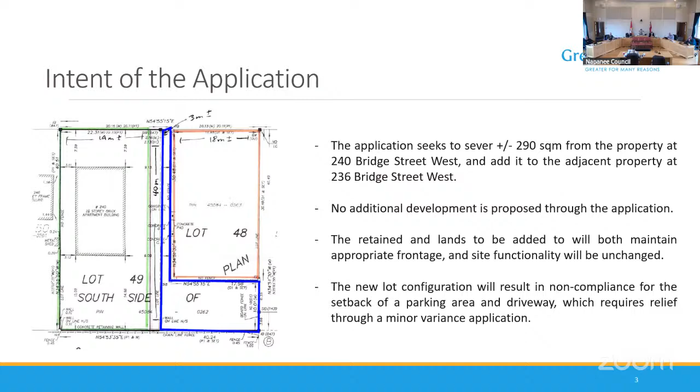There were no technical comments of concern from the public for the application. The county and conservation had no objection. It's a fairly technical land swap. As such, the application has been found to be consistent with the PPS, have appropriate regard for the Planning Act, and conform with the policies of the official plan. It is recommended that the lot addition be approved as presented. I'm available for questions. Thank you.

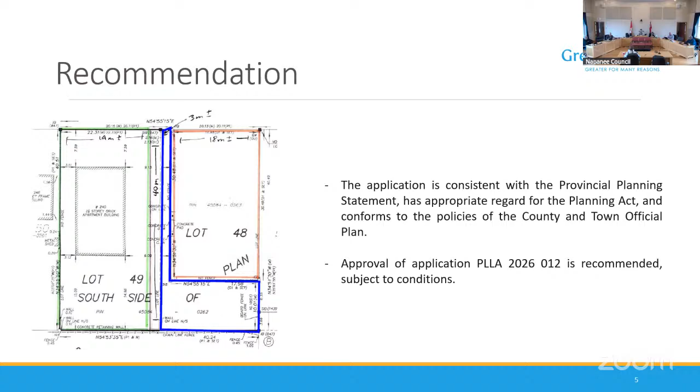Thanks, Dave. Is there any questions, comments, or concerns for Mr. Nanton with respect to the application and the presentation he has conducted? Seeing none, we do have a recommendation that Council receive for information the staff report for application PLLA 2026-012, and further that the application to permit a lot addition of plus or minus 290 square meters be approved, subject to a number of conditions contained in this evening's agenda.

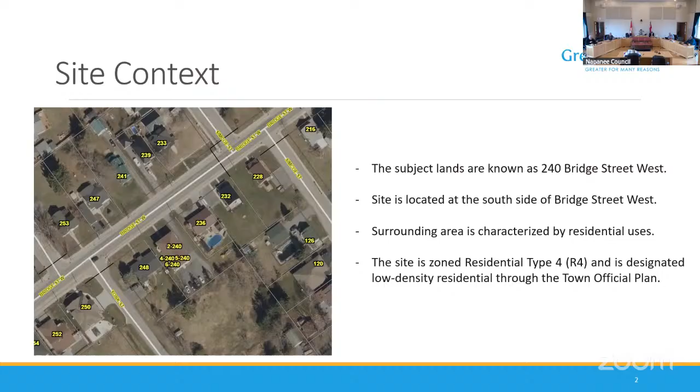Thank you, Mr. Mayor. Through you. This slide might look familiar, as the subject lands of the application are the same as those considered through the last application, but this is specific to 240 Bridge Street. So moving right into the intent of the application.

This application is just seeking a little bit of relief to recognize the new lot boundaries that result from the lot addition just considered. When the new lot lines are formed, it'll just be a slight further encroachment against the minimum setback of a driveway to an interior side yard. It's very technical in nature and really isn't going to change any of the site functionality or operations of either property, but technically a minor variance is needed just to address that non-compliance.

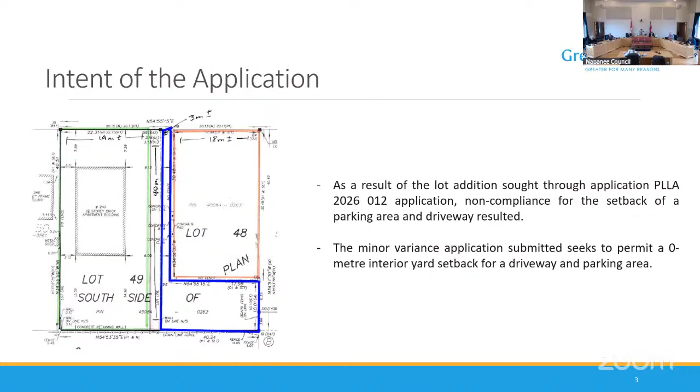So the request of the application is a 0 meter interior side yard at the tightest point, being the southeast corner, for the driveway and the parking area. I just provided this slide to give the context: approximately in yellow, added to the box in orange. So those are the lands to be severed in yellow, to be added to orange. When that happens, they'll obviously get a bigger benefiting backyard.

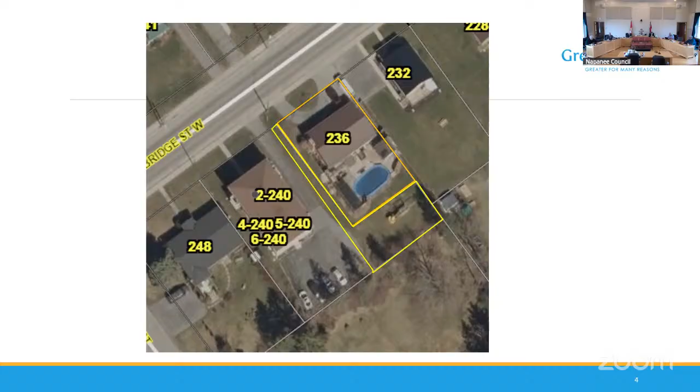But what will happen is the existing driveway we're seeing on this slide kind of jogs out at the back end to add an additional parking space. We don't want to lose the parking for the apartment. So it creates a 0 meter setback at that far area, which needs to be addressed. So it's a fairly technical application as well.

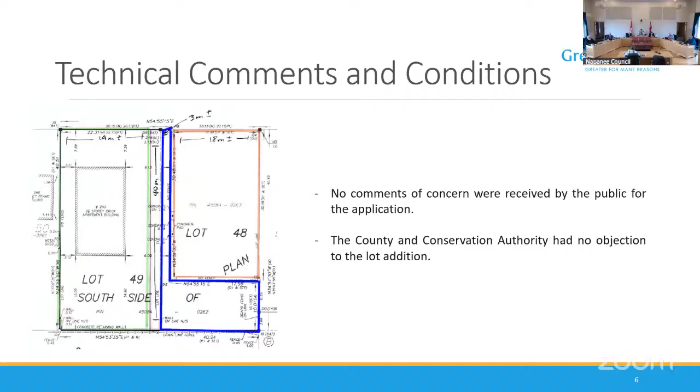No comments of concern were received from the public. The County and Conservation Authority had no objection. And we found that the application meets the 4 tests of a minor variance. I'm available for questions if we have any.

Thanks, Dave. Is there any questions or comments for Dave with respect to this application? Seeing none, we do have a recommendation: the committee receive for information the staff report for application PLVAR 2026-011.

And that the application for 240 Bridge Street West requesting the following variances be approved. Variance number 1, bylaw number 0222, section 4.27.d point V, requirement is the minimum setback of 1.2 meters between a side lot line and driveway. Proposed is a reduction of 0 meter side yard setback. The relief requested is a reduction of 1.2 meters in setback of the driveway from the side lot line, as well as variance 2, bylaw number 0222, section 4.27.I.

Requirement: minimum setback of 2 meters between parking area and the lot line of lower density residential use. Relief requested is a reduction of 2 meters in the side yard setback from the side lot line to the parking area. Look for a motion: moved by Councillor Shank, seconded by Councillor Davey.

If there's no further comments, questions, or concerns, all in favor of that motion? Opposed? Motion's carried. Next matter, file number PLVAR 2026-015, address 807 County Road 12, roll number

1121080060141110. Owner is W&S Demchuk, and the applicant is W.S. Demchuk. Once again, there's no one in the body of the council chambers, so the floor is yours, Mr. Knapp. Thank you, Mr. Mayor, and through you.

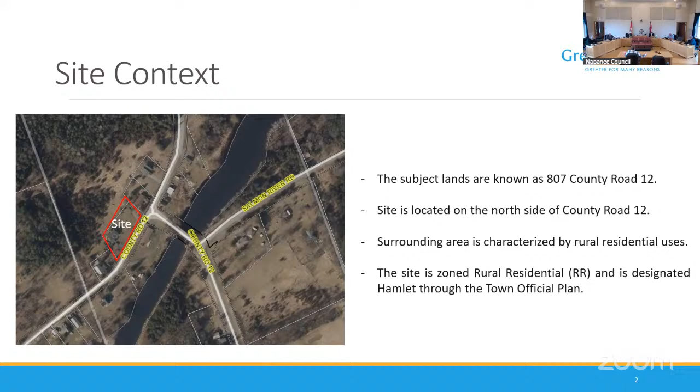To begin with some site context, this application is submitted for 807 County Road 12. The property is shown in red on the slide. It's just on the north side of County Road 12, in the hamlet of Forest Mills. It's a rural residential area, hamlet. The site is zoned rural residential and designated hamlet through the official plan.

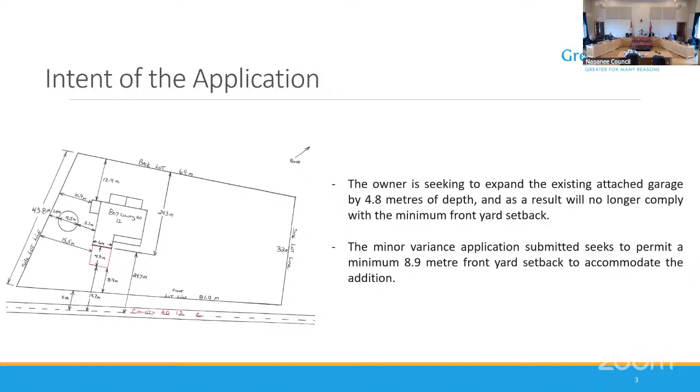So they've come forward with a minor variance request seeking relief to be permitted a minimum 8.9 meter front yard setback, which still accommodates almost 9 meters from the road right-of-way. So it's still a significant and appropriate distance.

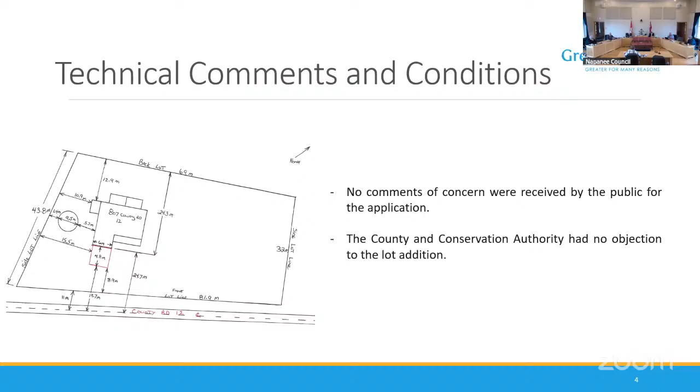No comments of concern received from the public for the application. The county, being the road authority, also had no objection to the expansion. Our recommendation is that the application meets the 4 tests for minor variance, and I'm available for questions if we have any. Thank you.

Thank you, Mr. Knapp. Is there any questions, comments, concerns for Dave with respect to the application or the presentation we've received this evening? Seeing none, we do have a recommendation the committee receive for information the staff report for application PLVAR 2026-015, and for the application for 807 County Road 12 requesting the following variance be approved.

Requirement is section 58.2 sub C sub I, minimum front yard setback of 15 meters. The proposed is a minimum front yard setback of 8.9 meters. Relief requested is a reduction of 6.1 meters in the front yard depth.

Look for a motion, moved by Councillor Davey, seconded by Councillor Shank. If there's no further comments, questions, or concerns, all in favor of that motion? Opposed? Motion is carried, and we'll look for a motion to adjourn the Committee of Adjustment.

Moved by Deputy Mayor Calver, seconded by Councillor Martin. If there's no further comments, questions, concerns, all in favor of that motion? Opposed? Motion is carried. Thanks, folks, and we'll see you at 7 o'clock for our regular session of council.